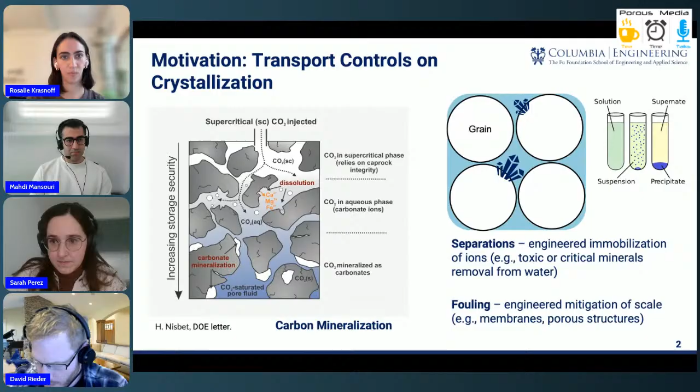Thinking about various pore scale crystallization behavior drivers, we talk about the morphology of the pore space, the geometry of the pores and how things move through them, as well as the partial saturation state. So those fluids that are interacting, providing the ions that are going to precipitate - how do they sit in the pore space, which is the wetting fluid, how much of each fluid do we have, and then a competition, or sort of process that's influenced by both advection and diffusion.

So for this experiment I'm going to talk about today, we have both diffusion and advection in certain parts of the experiment, as well as a reaction term, where when we have precipitation, that's a sink for the ion. And because this is a temperature-driven process, we also want to think about transport of temperature and heat as it moves through the system.

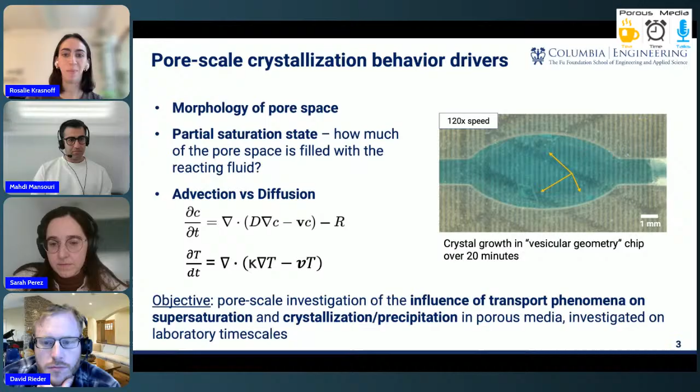So, stating my objective: to investigate the influence of transport phenomena on supersaturation and thus crystallization in porous media, investigated on realistic laboratory timescales where we can actually see this under the microscope, versus waiting what can sometimes be years to see reactions, maybe even longer than a PhD sometimes.

We have ion sourcing from a bunch of different places. There's a lot going on, so we have this coupled complex system of various dissolution rates influencing our overall supersaturation. There's also evaporation, which I haven't worked on too much, and I think we're going to hear about more later, but that's another way to drive crystallization.

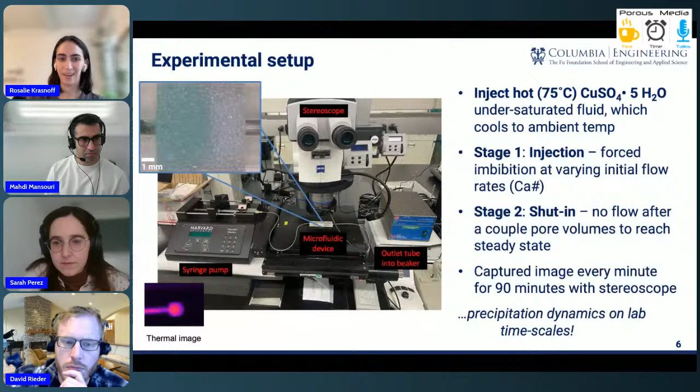In the first stage, I inject the fluid in. We have forced imbibition at varying initial flow rates. This is followed, after a couple pore volumes have gone through the chip, by shut-in. It reaches steady state, and then we enter a diffusive regime where there's no more advective flow, and we capture images for 90 minutes with our stereoscope to see precipitation dynamics on lab timescales.

The data that we collect looks something like this. This is 30 minutes of an experiment I did where you can see these crystals starting to grow, just darker, more dense regions, and they come through slowly, but you can usually see interfaces, the very edges of the crystals. Then we image the end state with micro CT and are able to look at those beautiful bright crystals

in 3-dimensional space with our micro CT. I extract those crystal surfaces and look at where they sit in the pore space - these are isosurfaces extracted into a little 3D image. One way I look at them throughout the presentation is just a 2D top-down view, where we're summing over the z direction, and the more yellow or green colors represent more pixels in the z dimension being crystal, allowing us to see the distribution of the crystals over that 2D top-down view.

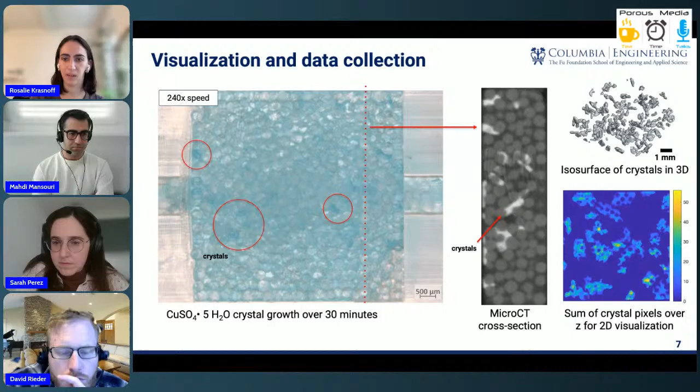All right, now getting into actually what's going on here. So we know that thermodynamically larger crystals with a lower surface area to volume are generally favored. Another way to say that, or what that means, is that precipitation is preferred on existing crystal surfaces versus creating an entirely new crystal.

So this data is from an experiment that's actually not done under the stereoscope, but instead entirely done in the micro CT, our micro CT scanner. We see change about every 3 minutes. I took a scan and we can see the change in crystals over time.

So in blue, that's the number of discrete crystals. That increases very rapidly over this initial period, and then pretty quickly, around 20 minutes in, levels off, and it looks like it actually decreases. That's because some of the crystals grow into each other and begin to count as one, but it's not actual dissolution, and we can see that in orange with the total volume of precipitated copper sulfate.

So although there's still more crystal to precipitate, and it's continuing to precipitate in this second regime, we know that the number of objects is actually not increasing.

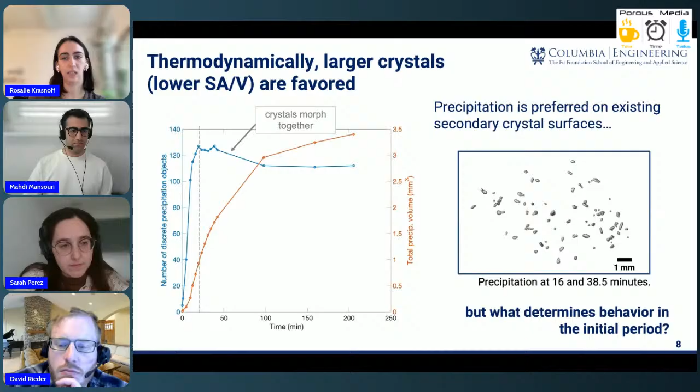And so that really begs the question of what determines this initial behavior during this initial period, because that's going to have the biggest influence on the end state. If it's just those existing crystals that already nucleated, they're going to continue to grow. So in this, I'm going to try to walk you through what I think the answer to that is.

So at lower injection flow rates during imbibition, there is more time for the fluid to cool. As it flows in, there's a local temperature gradient where the fluid front is cooling, and precipitation begins at that interface at the fluid front. Because precipitation begins, the concentration of the ions in the system starts to decrease. When we compare that to higher imbibition rates, the fluid is moving quickly through the chip, and so it remains hot, and precipitation doesn't yet begin during this imbibition phase.

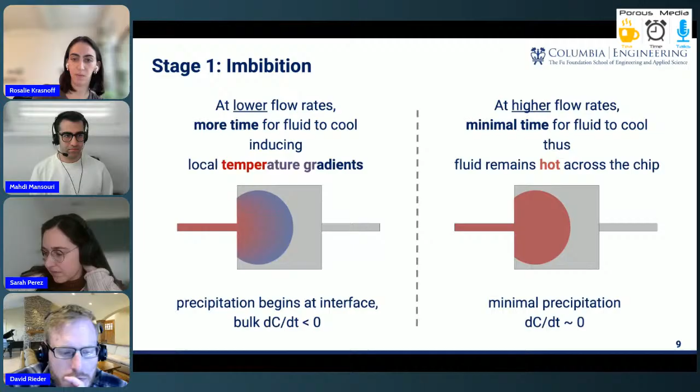Looking at the data, this is an experiment that was flowing quite slowly. There's a non-uniform front that sort of creeps through, gradually moves through the pore space, and then we can see that sort of mirrored in the precipitation behavior. So this is a fluid front that aligned pretty nicely with some of the crystallization that we see at the end. Just an alignment between the injection scheme and the end state suggests that precipitation has already begun, and that is very crucial to determining the crystallization behavior.

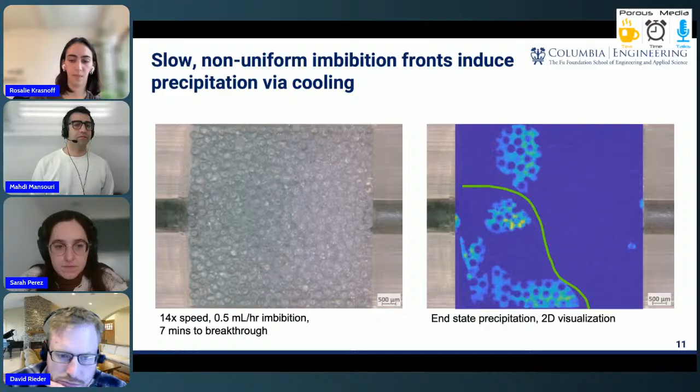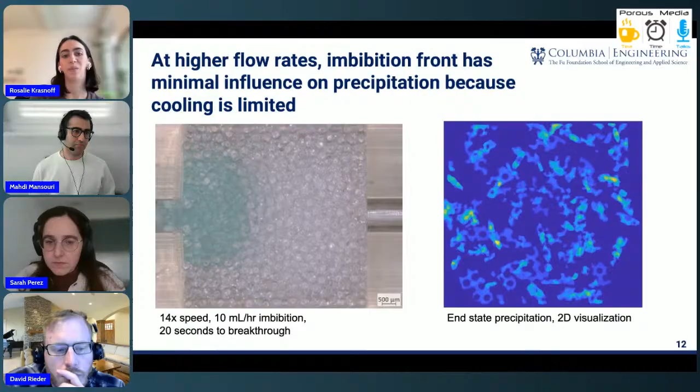So in this faster flow rate, what really matters is what comes after imbibition, which is shut-in. Going back to our lower flow rate experiments, in this scenario, they've already cooled a little bit, and they already have precipitated some. So when we're thinking about driving supersaturation, it's increasing still over this shut-in period. We're still forming more crystals, but the supersaturation is increasing relatively slowly, and so ion diffusion is able to outpace crystal growth, or that reaction rate, which corresponds to a lower Damkohler number.

Comparing those to our higher flow rate experiments, they haven't cooled significantly and they haven't precipitated significantly, so these values are still high, and so we're really pulling on that supersaturation lever very quickly and having it sort of shoot up during this shut-in phase. And so in this case, crystal growth outpaces ion diffusion. There's a higher Damkohler number.

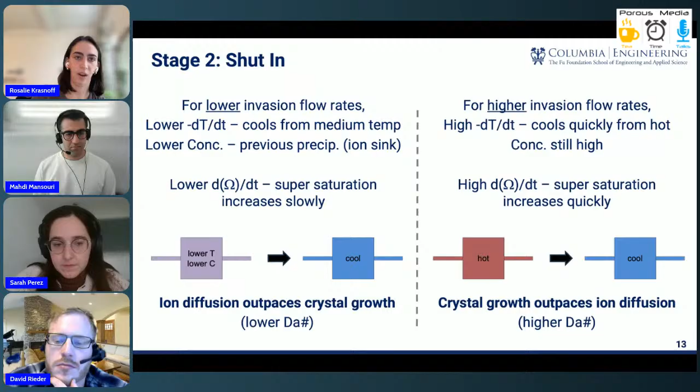What that means is that ions ready to precipitate are not necessarily going to be able to diffuse to an existing crystal surface before they precipitate because of that really high reaction rate. The result is that we see more crystals with a higher surface area to volume ratio, which is not what thermodynamics would lead us to expect, and they're more dispersed throughout the system, somewhat more chaotic.

So increasing initial flow rate, in blue we have the number of crystals, in orange the surface area to volume ratio. In this first slower regime with a lower Damkohler number, we see fewer crystals that are larger, compared to a higher flow rate with higher Damkohler number, where there's a bit more chaos, crystallization sort of everywhere and more dispersed.

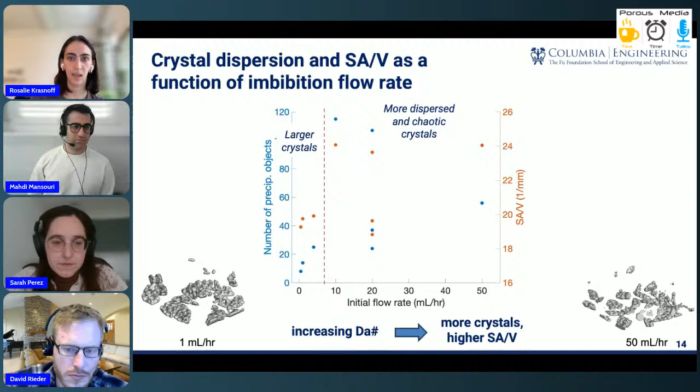And then just visualizing these from my experiments, we see just a little bit more order at a lower invasion capillary number. Again, crystallization everywhere and much smaller crystals at the higher invasion.

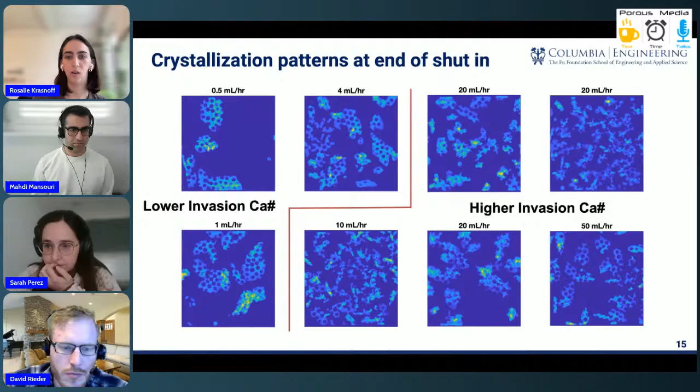And then the final case that I'm still working on exploring is advective flow, where we don't have that shut-in period and instead continue to inject fluid throughout the experiment. In this case, crystals grew even larger, and there were fewer of them.

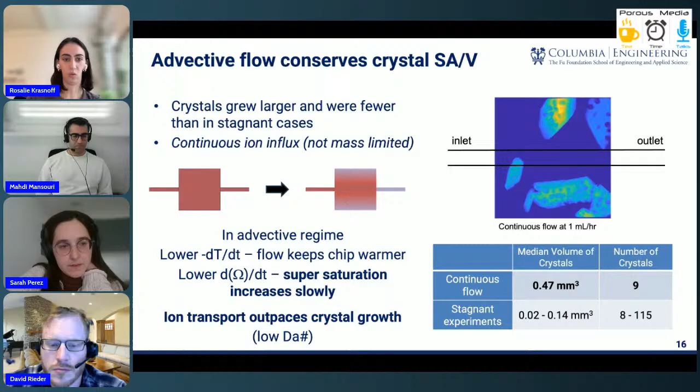Part of the reason they grow larger is, of course, because we have continuous ion influx. Every time we inject more fluid, the crystals can grow more because there's more ions to precipitate. Additionally, the injected fluid is hot and keeps the chip from cooling as quickly. So, similar to our slower flow rate, that keeps the change in supersaturation more gradual, and ion transport is able to outpace crystal growth, corresponding to a lower Damkohler number.

So to wrap this up, hopefully synthesizing what I've told you about today: we know that crystal growth minimizes surface area to volume ratio, and that is thermodynamically preferred. But in a system that quickly evolves towards supersaturation, the surface area to volume ratio and dispersion of crystals can be transport limited.

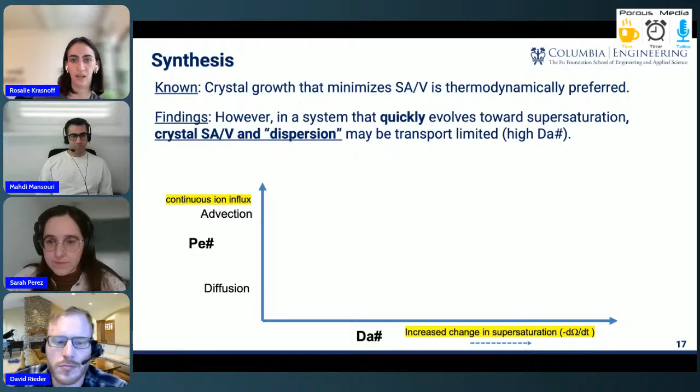And for this case of temperature-dependent solubility, precipitation is a function both of the change in temperature and concentration. So the Damkohler number is influenced by invasion time and Peclet number, which corresponds to whether it's shut in or not.

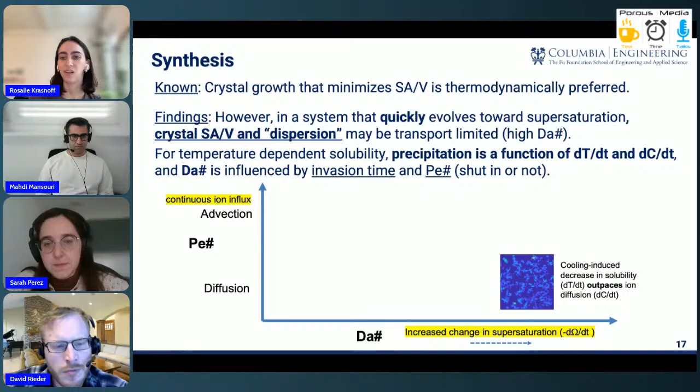So just to start filling in this regime diagram: at a high Damkohler number, cooling-induced decreases in solubility are very fast and outpace ion diffusion, leading to really dispersed and small crystals. Whereas at a lower Damkohler number, ion advection-diffusion is on par with cooling-induced decrease in solubility, but we can have different Peclet numbers corresponding to somewhat similar behavior.

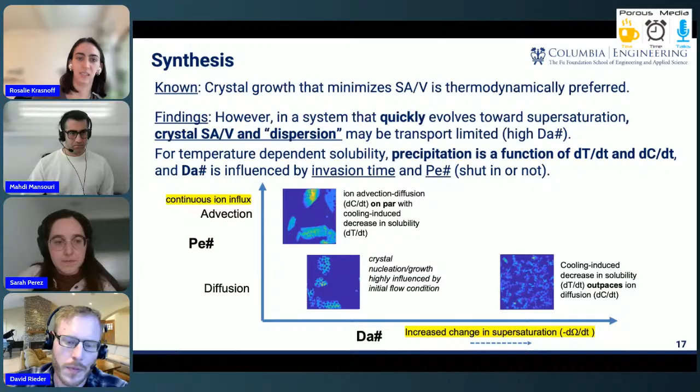So these two have different setups, but look more similar than these two cases, particularly the case with the shut-in, where crystal nucleation and growth is really influenced by the initial flow conditions. So we know initial conditions are often really crucial, and in this case, it may really be running the show.

So returning to the implications, we could think about the separations process perhaps having an engineered injection scheme in order to prioritize certain kinds of precipitation behaviors, to achieve whatever ideal end state you're looking for.

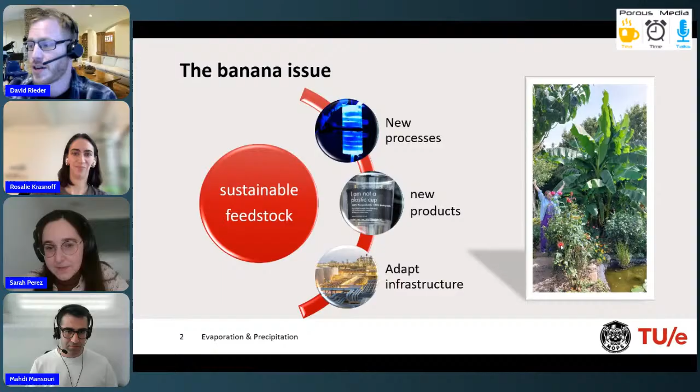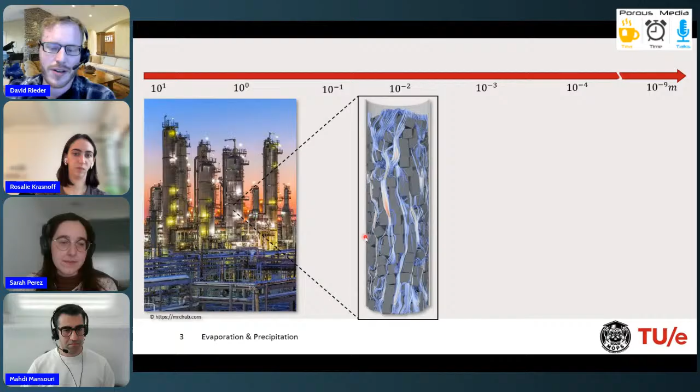But of course, we talk here - I am also interested in the reactors, but I'm more interested in what happens inside those catalysts, where in some cases we have gas-liquid flow, a solid phase in there, a reaction, heat is produced. We have mass transfer limitations, heat transfer limitations, all caused by what is happening at the surface of those grains, really inside a pore, nanometer scale.

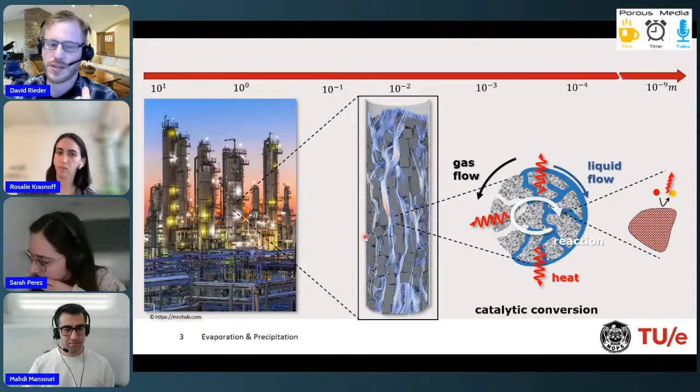Now, I'm mostly interested in those catalysts - how can we produce them, and how do they perform best? And there are a few side conditions we need to think about.

So if we are in production, let's say we have a spherical particle, there's a lot of catalyst inside that we want to use. We have the first problem: catalysts are extremely expensive. If we talk about nickel, that's a cheap one, and that's already not considered very cheap for manufacturing. We can go to ruthenium, gold, whatever you want - usually expensive.

You don't want to waste any of those. When you are in such a production process, inside your reactor, you also talk a lot about heat and mass transfer resistances. That's fine, right? The heat has to travel in, it is consumed in the reaction, and the educt has to go in, the product has to go out.

They're all competing, tricky. Additionally, in such reactors, if it's a solid packed bed, attrition is often not much of a problem, but it can be if you talk about fluidized beds, like the fluidized cracking systems. They're constantly colliding and things are chipping off, which is also not necessarily good for predicting what is happening there. And finally, we have poisoning.

It's all nice if your educts are pure, but in reality, they never are pure. So we have problems with poisoning. All of that leads to the result that, in practice, we do not homogenize the concentration of the catalyst in our particle. We try to have a dedicated profile inside, so if it chips off, we don't lose any of our valuable catalyst.

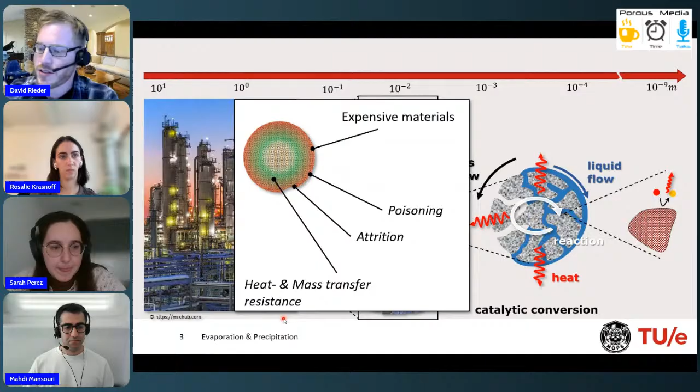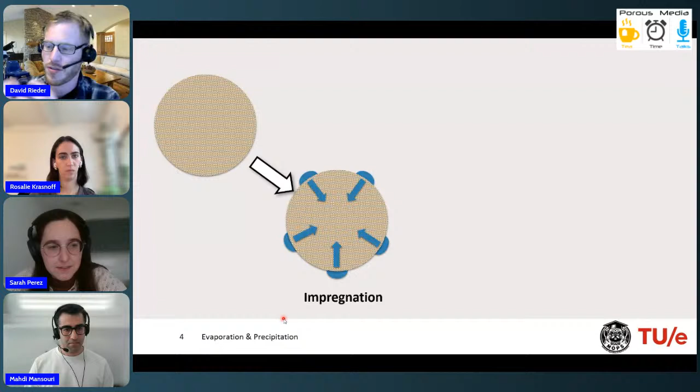So how can we control that we get the profile that we need theoretically? For that, I looked at the most common process to produce those catalysts, usually called the incipient wetness method, where you start with your dry porous material with a very high surface area. You put some liquid inside, so you impregnate it with a salt solution containing your expensive catalyst dissolved in there. Then you dry it, heating it up to get rid of all the liquid so that only the catalyst is left over. Finally, you calcinate it to refresh the surface of this catalyst.

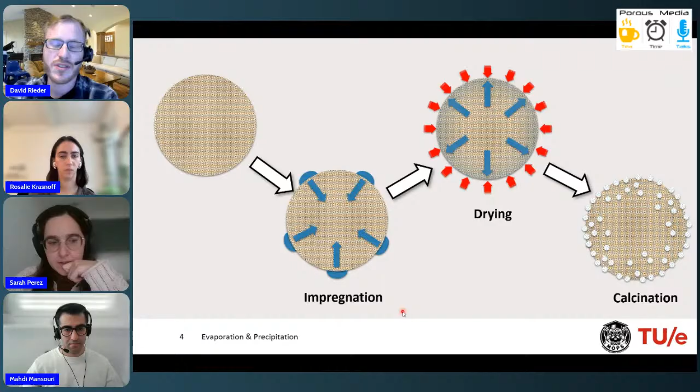If you're into catalyst production, you will usually start thinking about impregnation if you want to think about the profiles. But often impregnation is not relevant here because we're talking about high loads—industrial catalysts go up to 48% of catalyst on a support. At that point, the adsorption happening during impregnation is irrelevant. What's really relevant is the drying step, where the liquid goes off, the crystals are forming, and capillary suction redistributes everything inside your catalyst.

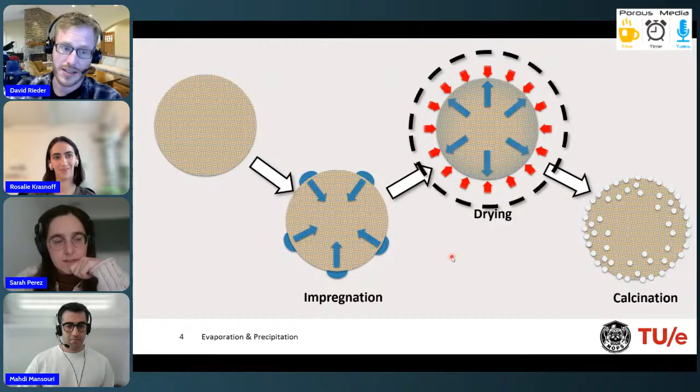That's one thing I started investigating in my PhD. First we have to look at the transport phenomena inside such a catalyst pellet. From a schematic point of view, we have a liquid phase, a gas phase, and something dissolved inside our liquid phase. When we evaporate, we form contact angles or contact lines at this point.

Those contact lines lead to capillary action, so our liquid is moved towards the gas phase because it wants to counteract what's happening there. Additionally, we have evaporation, which means we have local cooling—your liquid is cooling down. That has to be somehow transported by heat transfer.

We have an air and vapor flow, right? So we're evaporating something, and that vapor has to leave. Eventually, inert gas has to go inside because we don't have any vapor anymore. Finally, we have oversaturation and precipitation inside.

There are, of course, more effects. Rosalie already mentioned ions—ionic transport is actually one of the classic ways to control the movement of particles inside. You have very large molecules that you attach to your salts, counter ions, and they will drag the whole material so it won't be too mobile anymore, for example. I'm ignoring that for now, just for simplicity.

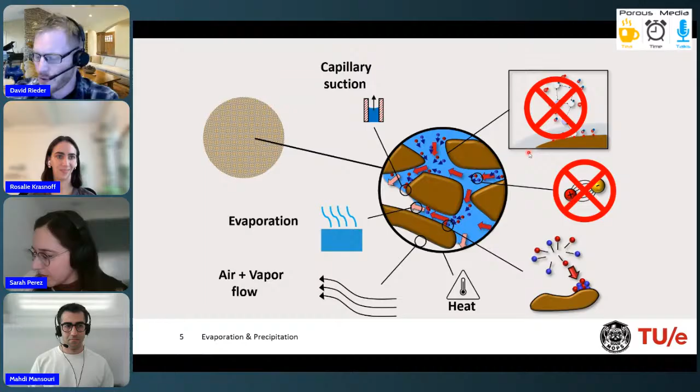So now, before we can look into the results, we first need to understand a bit how drying of such a porous material actually looks like usually.

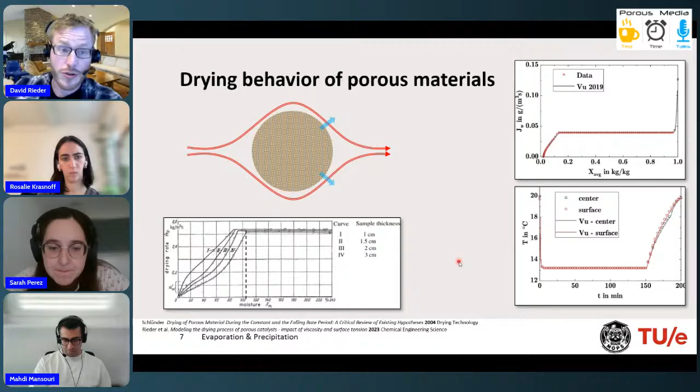Now we've seen how it should look like for those kinds of systems. Let's look at what people usually think about when they talk about drying of catalysts. Often what you will see is a drying front - this is the classic model that says we just have basically a droplet, and the droplet is shrinking, and the porous medium is just a way to get effective coefficients out of there.

Very popular, very wrong. There's a wonderful paper by Schlünder from 2004, who did a lot of work on drying, on these receding drying front models, where he basically says after 30 years of research, he realized this doesn't make sense physically. That doesn't mean the models do not work within certain limits - I will show you that - but they are not necessarily physical because they basically neglect capillary suction. That's the basic idea behind it.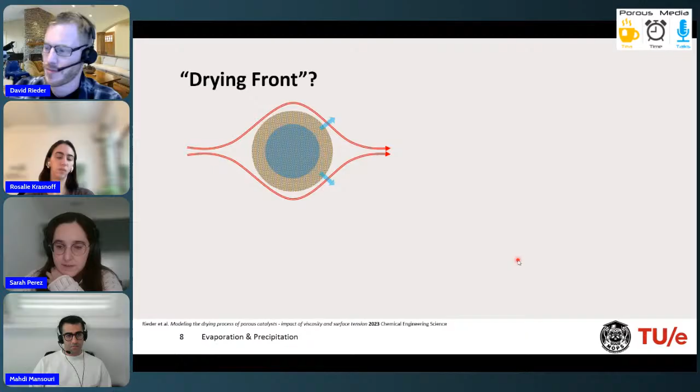Now if we do this full simulation that I showed you with the capillary suction, with different viscosities, we have here the radius of our spherical particle, let's say it's 4 millimeters in diameter, and we have the saturation levels. We start at 0.001 Pascal seconds, so this is basically water.

What you will see here is that actually almost all the water is transferred to the surface until we have some kind of snap-off area. This is when the liquid is not in the bulk anymore, but only the leftover at the inner surface. So there is no bulk anymore, no capillary suction, nothing anymore. This is when this kind of problem happens, but then we also don't have transport anymore. So if we have water, there's actually no such thing as a drying front, except once we have no transport of liquid anymore.

Now, if we increase the viscosity, what is the possibility in drying? We try to get the liquid in, and we try to increase viscosity to prevent the capillary suction or reduce the impact of it. You will see that things become more and more like we expect this drying front to look like. So we have from 0.01, so 10 millipascal seconds, 100 millipascal seconds, and 1000 millipascal seconds.

To give you a reference, because not everybody is good with those values - this is a bit more dense, more viscous than yogurt. This is going to move a lot in a particle with a pore size of 10 nanometers - actually, it's not going to move a lot. And then we actually see this kind of drying front appearing again.

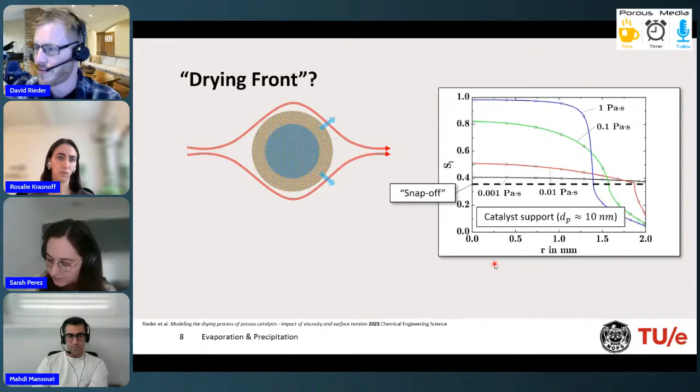Now, let's have a look at another property, that is the gas pressure inside. That's a bit of an interesting one.

Because you would estimate, okay, we have evaporation, so we are limited by temperature and what the pressure looks like. But in the end, we have to be clear that there's also inert gas inside that has to go out. So we try, and there's also the liquid levels are falling. That has to be substituted by a lot of inert gas going in, for example air or nitrogen. And eventually, when everything heats up, that has to go out again.

What we see here is the gas pressure over the radius and how it develops, the pressure profile over certain time steps, and also the liquid saturation, but mostly the pressure is interesting. We see that we have a very high pressure at the center of our particle. And we talk here about a 4 millimeter diameter particle, which means we have a huge pressure gradient, which in the end leads to huge stresses on our catalyst, which leads to the breaking of the particle.

So this is a bit of a quality management part. If we can reduce the pressure inside, we can also prevent the breaking of the particles during the drying process. And we get more healthy particles, which we can then finally use in our reactor.

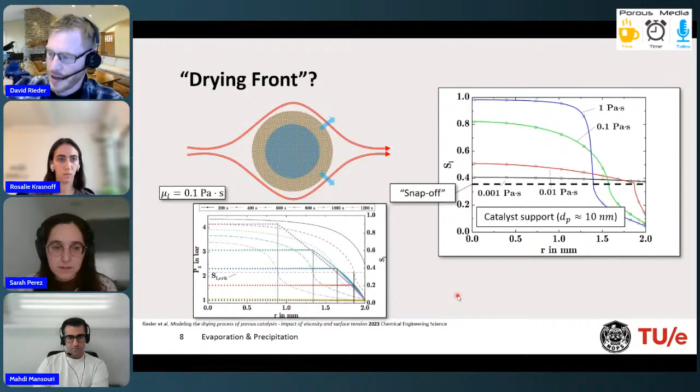Now there's of course the question, what happens if you have varying liquid viscosity? What if this viscosity depends on your concentration? Usually we would say, depending on the salts you have or other additions, you might have glycerol or so, you go to a very high concentration, you reduce the water, glycerol does not evaporate, and then suddenly at one point your viscosity jumps up.

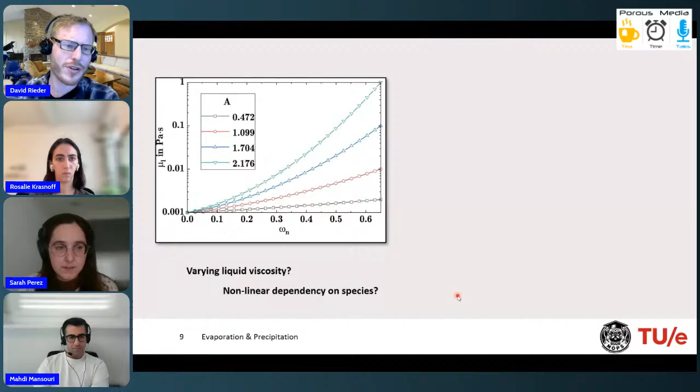I will not talk about this here in view of time because I want to still show you something else, but I will just show you one of the papers that we made out of this model, which also has a bit of a nice trick on how you can control profiles just by managing process conditions.

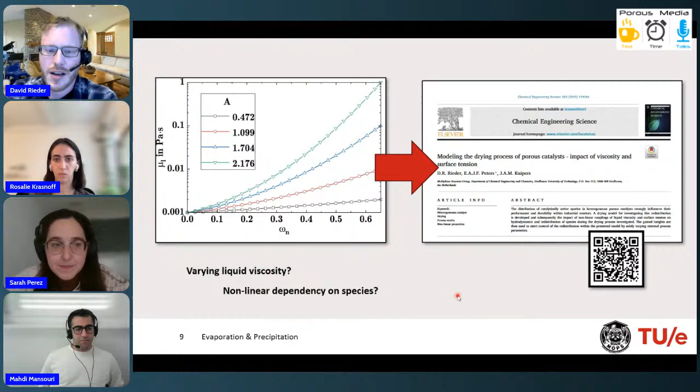But now the next step, because we're also talking more about subsurface, right? A lot of people go into subsurface modeling. There's something else I was interested in: the morphology of the pore space. So how does our pore space have an impact on the redistribution in our particles and in our process, on the evaporation and precipitation?

And I mean, there are a lot of parameters we can have a look into. That is, of course, you have porosity, we have specific area, we have pore size distribution, all of those wonderful properties we can think about. And somehow we have to get out of those ideas about our permeabilities, right? Talk about the flow, we need a permeability. We need to have an idea about how our diffusion looks like, how our conduction looks like. And finally, what most people are probably familiar with is the saturation capillary pressure curve. There are many different ways how you can describe such saturation capillary pressure curves.

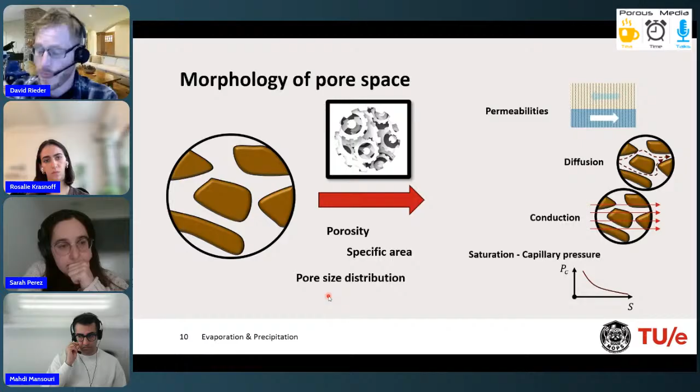But I wanted to know what happens if I change my pore space. Which means I need to have some kind of description that allows me to take, for example, a pore size distribution and get a saturation capillary pressure curve out of there. It's really like a parametric investigation. That's why in the end, what I chose was a bundle of capillary system.

Not very realistic, okay, but it has the advantage that I can take any pore size distribution and get my permeability values back, my partial permeability values back. And even most important, I get my capillary pressure saturation curve back out of this adaptation.

And then I can do a very nice parametric investigation. For example, by saying, okay, I change the volumes between my different modes in the pore size distribution. Now, to give you a bit of an example, I looked in catalysts. So we talk about usually 10 nanometer size pores, can even be smaller. And I now, more or less arbitrarily, said I have a 1 micrometer pore, somewhere, a peak around there. There can be fractures that can be designed in there.

And I looked at what happens to your permeability and to the filling radius. It's usually, and with permeability, what you might expect, of course, if you have, let's say, 50% of your volume in the large pores, we can get actually quite large liquid permeabilities or gas permeabilities in our system, right?

If we have large pores, we have lower resistance, and we get a lot of flow that can go through. If we reduce the amounts, 40, 30, 20, going further down in those pores, the permeability decreases. We see more and more of the permeability going towards the lower levels, where in this graph we actually cannot see it anymore, to the point where if we have 0 large pores and everything is 10 nanometer pores, we don't even see it in this graph anymore. So I hope that gives you a bit of an idea what is happening there.

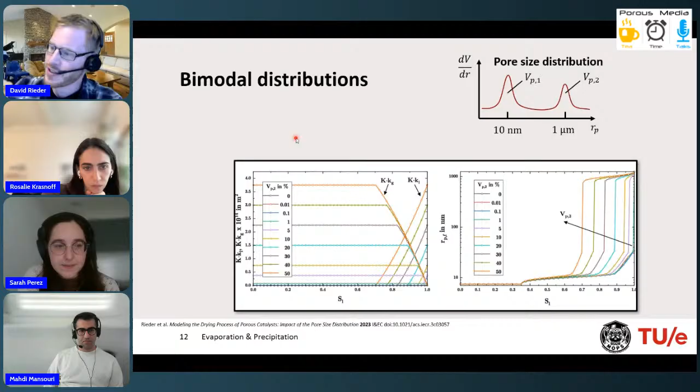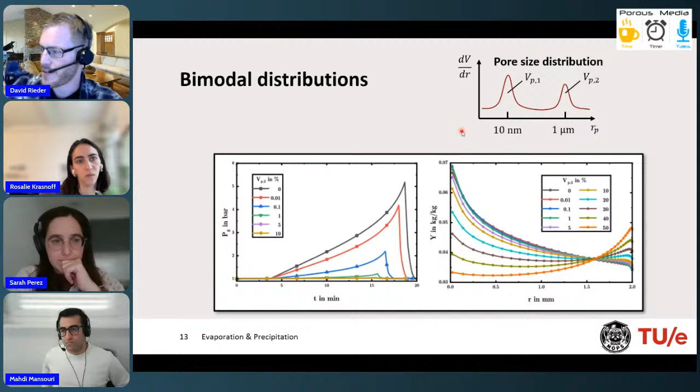So that brings me to the conclusion. When the whole thing is dry, what have we learned? This is a phenomenological drying model, right, so it's very rough - it gives you an idea about what is happening there. It's using an analytical pore space model, this capillary bundle of tubes model, which you can dispute.

In the end, what this research also showed a bit is that with smart support design and process design - the one I kind of skipped over because I referred you to the paper - smart process design can help you improve control of how you distribute this precipitation inside your catalyst. But of course, this is a very parametric model, a bundle of tubes - I get weird looks if I present this to geoscientists. It's not the best model, but it was the only one I could find that gives me what I need in a nice and consistent fashion. Yeah, percolation is not modeled at all.

So you have snap-offs of isolated pockets in there, and then the liquid does not move anymore and just dries shut in there. We get large crystals, which we actually don't want. We want to have a small surface area... a very large surface area, very small particles inside our catalyst. The pore space is actually shrinking throughout the process. We talk here about 10 to 40 weight percent of material in there. This is not negligible anymore, but everybody conveniently does.

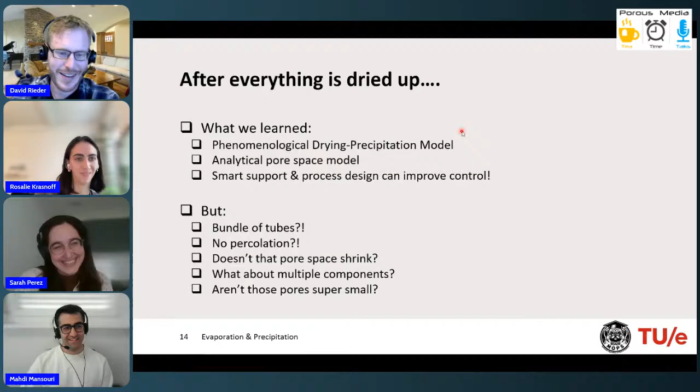Thank you very much, David. Very engaging talk.

So we have some questions from Marcel in the comments. First of all, fantastic work, David, congratulations. Marcel asked, was there any special reason for using bimodal distribution? Are they more common in practical systems?

Yeah, thank you very much for the praise. So bimodal is mostly the idea that I wanted to have something to get an idea of what happens if we have a non-conventional type of pore space, right? Fractures usually have their own trickiness in there, but this was one of the things I thought about. Also it's more the question of exploring what we can do, if we can do it by design - there are people who design such pore spaces with those bimodal distributions. And in the end, I also did a PhD, right? You need to get to something. This was a very convenient way to get some interesting results and to, let's say, trigger a bit all those people who do catalyst synthesis, to give them some ideas of what they still can do.

I hope that answers the question, or otherwise I can still elaborate on it. Okay, thank you very much. Is there any question in the studio?

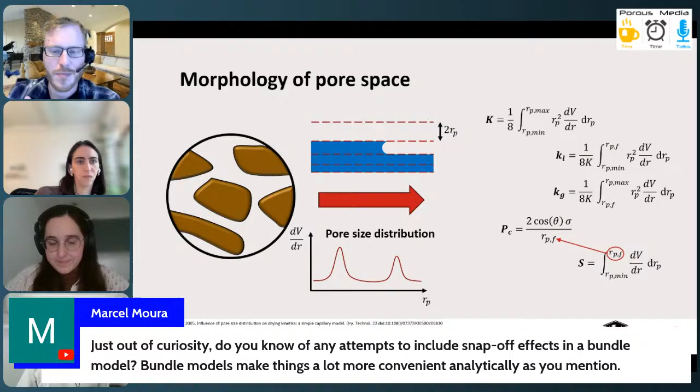But of course, it would be super interesting to get something like this going, although maybe with another type of model, because this bundle of capillary model is super simple to start with, but it also runs very early into limitations, because we talk about a very sharp drying interface, this very one radius we are talking about, and otherwise you have to spread this radius to get a sphere of influence. Or we start completely with population balances for the pore size distribution, which I started kind of, but it was in the 4th year of my PhD, and due to time issues, I stopped again.

Okay, thank you very much.